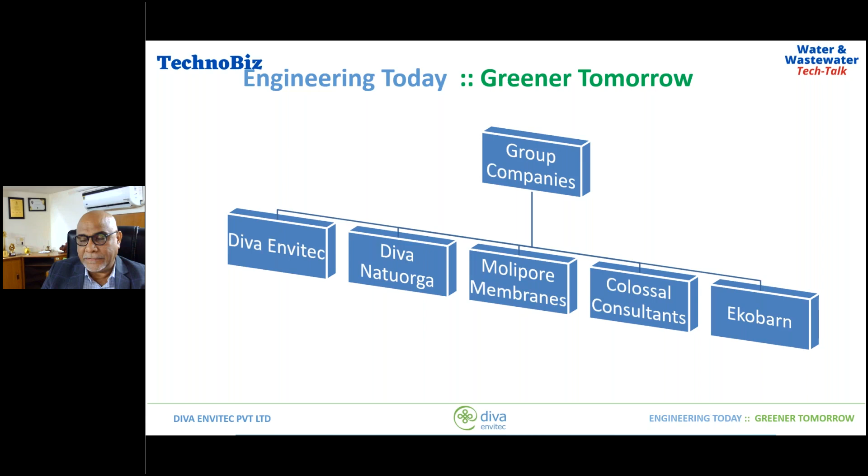I think of the four companies he mentioned, Colossal Consultants, I think he missed, which is a Dubai-based company. We have that mainly for analytical testing for the refining and oil industry.

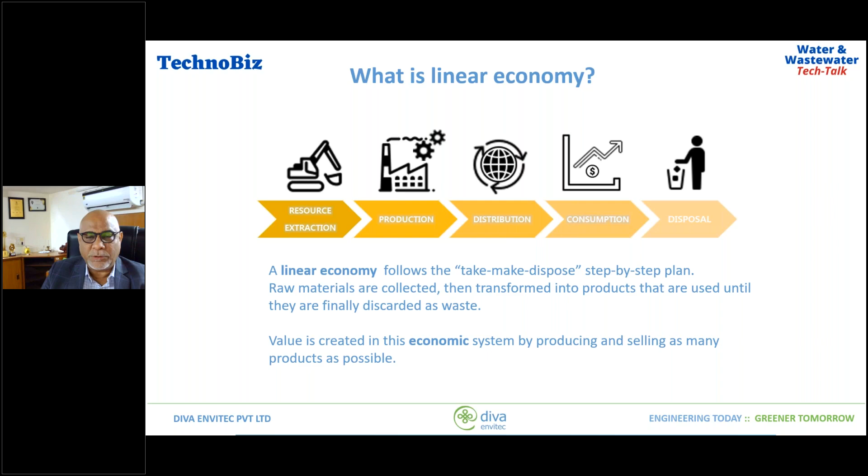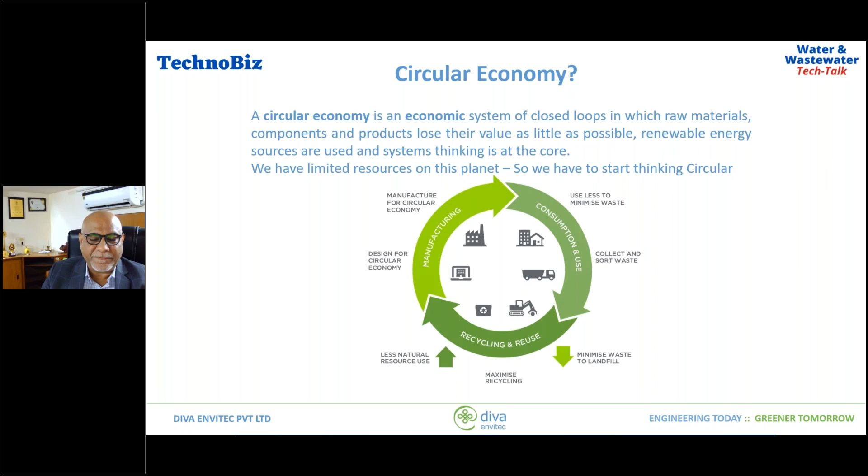As a company, we are totally focused on sustainability, and slowly we are taking most of the companies, training them to think on a circular economy rather than thinking linear. The world has been thinking linear, and that is where we have landed today. The problem of the world is that we have not really thought of the cradle to grave concept and how to use the final product. That is what has been missing, and we are now trying to, with my lectures on sustainability, talk about process intensification with different companies. The journey started from 1995. We have come to 2021, where our focus is now concentrated on wastewater. But beyond that, we are also in hot gas filtration, catalyst filtration, and hot gas liquid sparging systems.

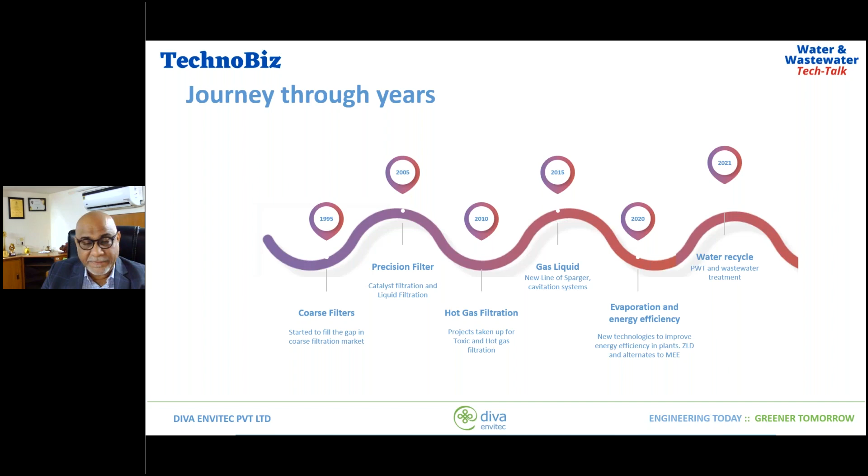So it's a very wide range of products which we offer. And in 35 years in this business, we are capable of designing very critical systems.

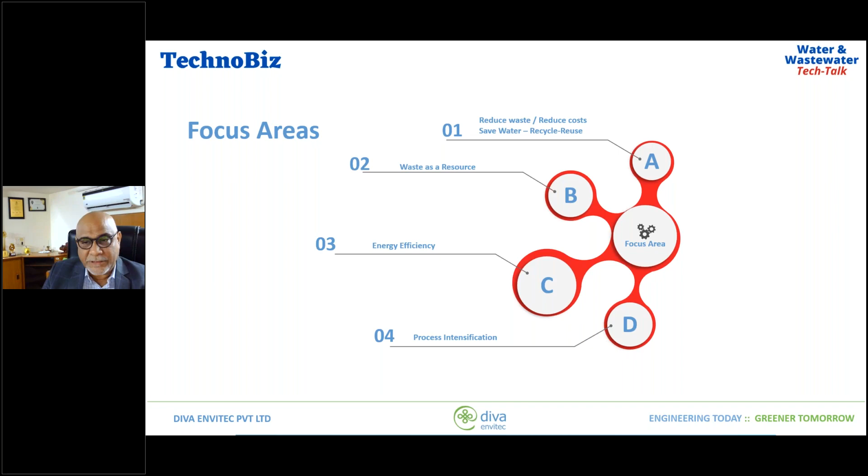Our focus areas, if you can see from this chart, this illustration, we are basically focusing on reducing waste, reducing costs, saving water, recycle, reuse. These are the buzzwords which will lead us to sustainable living down the line. Sustainable manufacturing has to focus on these areas, starting from energy efficiency to process intensification. So the five verticals we work in are filtration and separation, reaction engineering, thermal operation, mass transfer operation, and wastewater treatment.

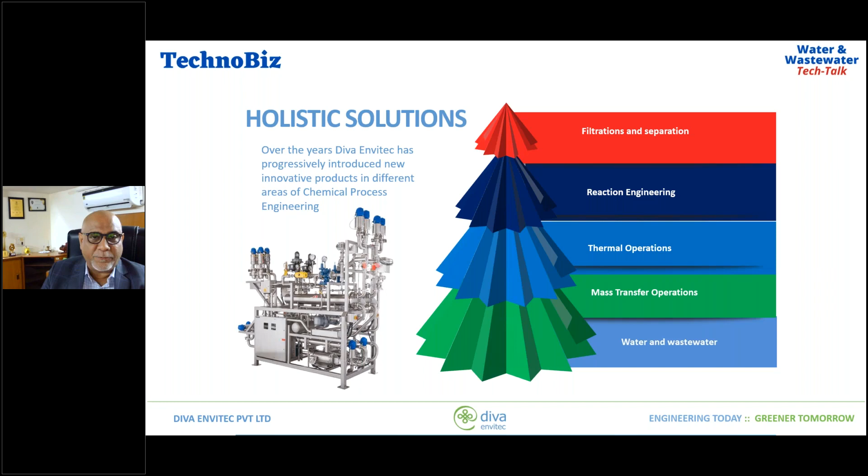Some critical products which we have developed over the years, these are our own products, which are DISORB, which we will be discussing in detail today. Then we have the ProMem, which is the membrane-based systems, PHTOX, spent caustic treatment for refinery, oil and gas sector, Supercav aeration systems, Molipore membrane, Rusonics for using cavitation as a process, and Contufilt for the filtration and catalyst.

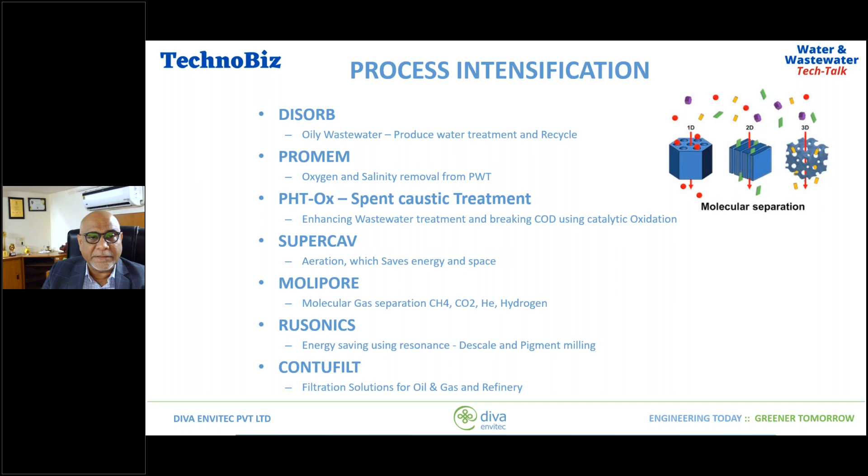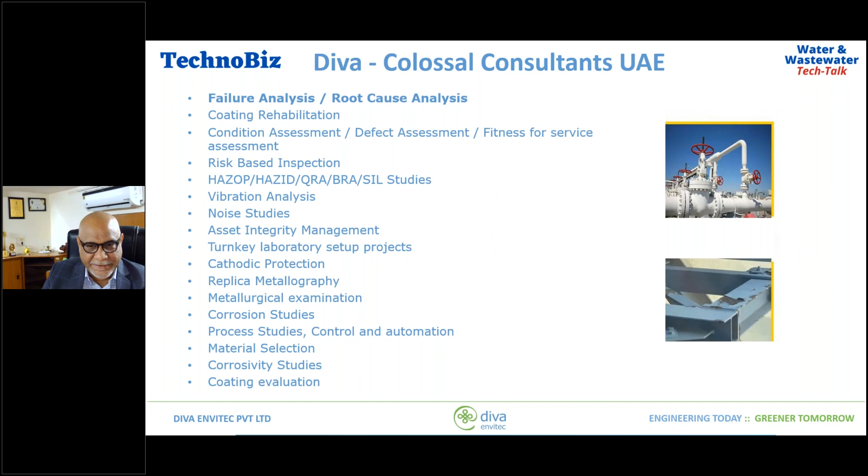So without spending much more time, let me just delve straight into the topic while we are here. And we are going to be discussing the DISORB technology. It's the oil separation technology for oily wastewater treatment.

Now, you all must be aware of different types of wastewater treatment where oils are concerned. So you have the plate interceptors, then we have the DAF systems, then we have the nutshell filters, we have the skimmers. There are so many technologies available, and we also know the challenges which they come with. So we have understood, and we are trying to address these challenges using our DISORB.

So what is DISORB? DISORB is an innovative, revolutionary technology in the oil and gas sector. We don't use any coatings, no polymers are used to create DISORB particles. It is basically an inherently oleophilic material. So it is made by calcining, and then it is sized.

We are getting some advantages. We get very high recovery of oil and water for recycle and reuse. We get high removal of oil and TSS. Now, oil and TSS together can be a nightmare in the produced water or in a refinery, where the sludgy waters come. It carries a lot of total suspended solids. And when oil and suspended solids get together, you get very greasy, lumpy masses.

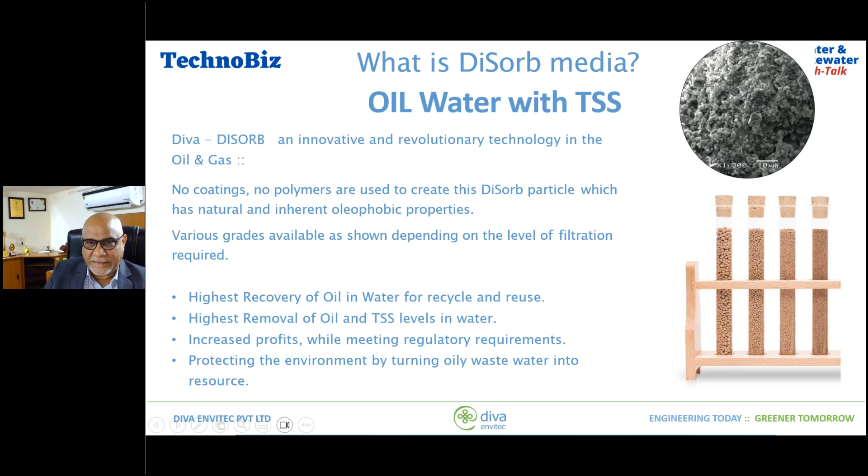Especially in the produced water plant, I don't know how many are from the produced water sector right now. The nutshell filters down the line, they get very badly choked, and sometimes you have to open and use crowbars to remove the media out. So we will be talking about the various advantages our media gives compared to the typical nutshell filter and the other technologies which are preceding a nutshell filter.

So it's a disruptive technology. It efficiently recovers water. It's oleophobic, as well as certain layers are hydrophilic in nature. So it has got anti-clumping coalescence, and it also controls hygroscopicity. So you can imagine we are trying to bring in so many characteristics in the media, and it comes with its inherent advantages.

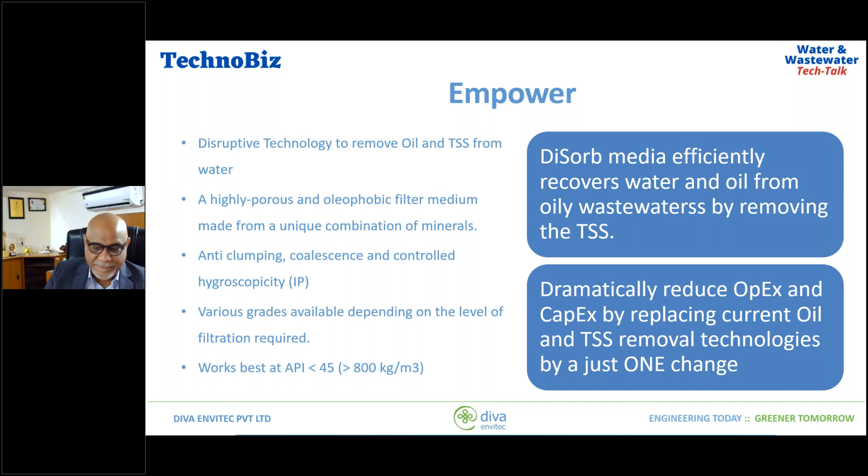It can be used in various parts of the oil industry. We have upstream water filtration. You have the frac water, which carries oil with it. You have the produced water, downstream waters. You have the slop oil waters, then processed water tailing ponds in refineries, then midstream oil transportation and storage, tank cleaning, oil recycling, and then soil remediation and oil removal.

Now, I'm sure some of these applications you will be able to resonate with if you belong to that industry. But having said that, I would say that this particular product which we have made also has immense applications in other industries. For example, the metal industry, where you have cutting oil, and on the rolling mills you have these oils and particles of metals and sludgy mass coming. It works beautifully over there.

In edible oil factories, where wash waters come to the effluent treatment, you all know that oil coming to the effluent treatment can cause havoc to the biology of the system. So whenever you have a biological treatment plant in any factory, you have to take care that the oil does not enter there. And the conventional methods which we are presently using, like dissolved air flotation or dissolved gas flotation or induced gas flotation, or API separators or corrugated plate interceptors, so many, there can be challenges in managing them, and those challenges can actually have certain surges of oil entering into the biological plants, which create a lot of problems.

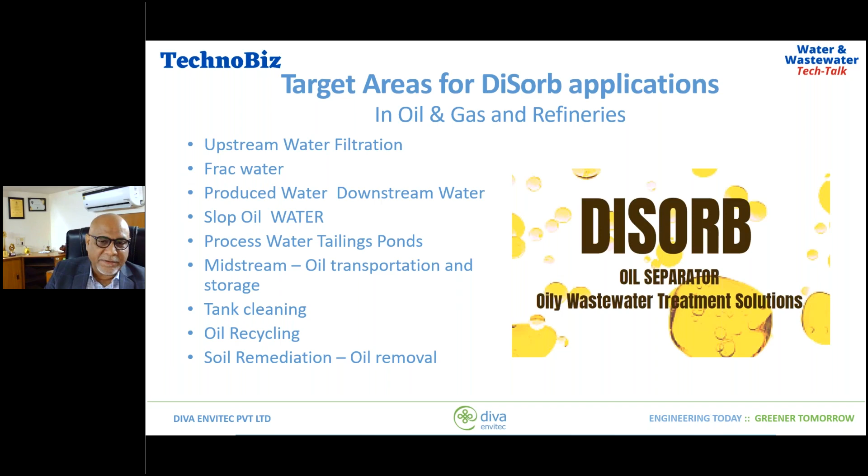We all know the principles behind coalescence. You have a particle, or rather a droplet, which goes at a particular velocity, and when it impinges against a fiber or a surface, in case of a plate interceptor, it's a plate it impinges on. In coalescers, it impinges on fibers, and in our media, it impinges on the media. But the principle of coalescence remains the same.

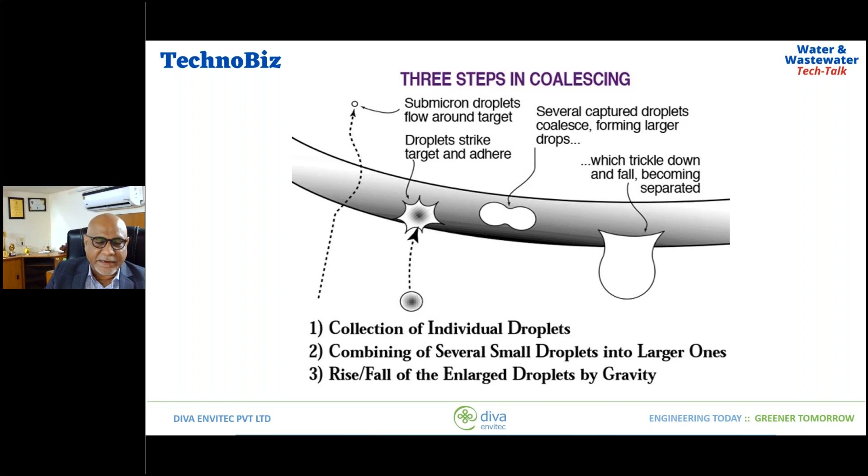So you have the submicron flows around the target, the droplet strikes and loses its velocity. Several captured droplets coalesce, forming a larger one, and then they trickle down and fall. So this is the principle behind coalescence.

If you look at the chart, you can use different technologies to treat different types of oils in water, or emulsions, colloidal emulsions, and that depends on the size of the droplet you are intercepting. So once you're getting to less than 1 micron droplets, the microfibers, hydrophobic fine fibers and membranes come into picture. Then you have ultrafiltration, where there are much larger particles or droplets to be removed. Ultrafiltration does a wonderful job.

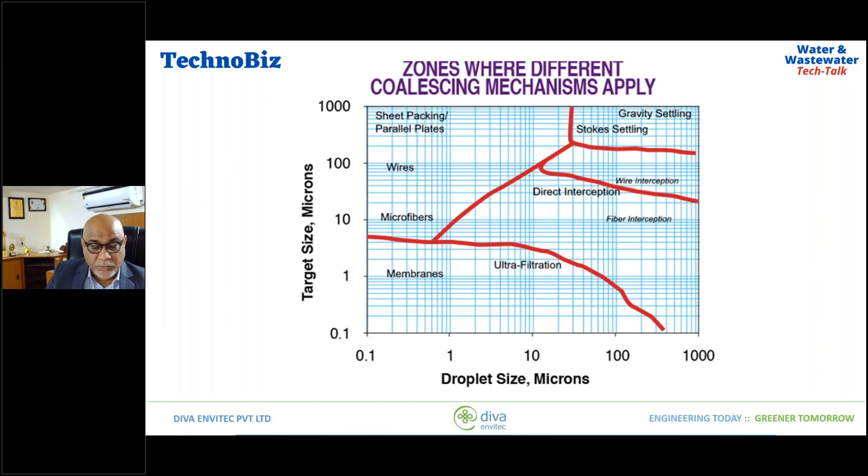Now we have introduced the complete ceramic range of oil removal systems. So based on the application, we decide whether we want to use a membrane, an ultrafiltration, or we are going to use the DISORB media. But for produced water, predominantly it is going to be DISORB, because of various reasons which we will discuss today.

So the same droplet coming, losing its velocity, it goes onto the filament or the particle where it hits.

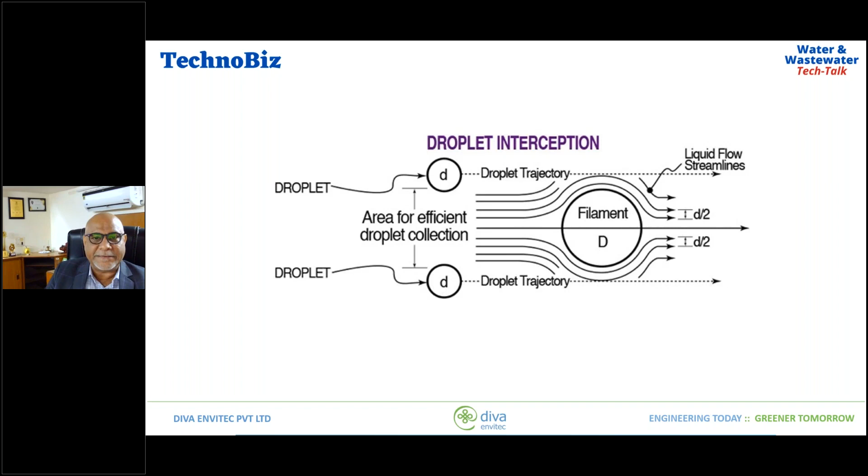It's a quick test to see how the emulsions are. If you take a water sample and keep it aside, and if the settling takes place in less than a minute, meaning the droplet sizes are settling or the flotation of the oil takes place in less than 1 minute with separation into 2 layers formed, then it is an oil droplet of more than 500 microns.

If it is taking about 10 or less than 10 minutes, it is between 100 and 500 microns. So it's a weak emulsion.

If it is taking hours, then it is a moderate emulsion, and normally the particle sizes are in the 40 to 100 micron range.

And if it's taking days, it is a strong, very stable emulsion, and droplet sizes can be 1 to 40 microns.

And if it is a very strong one, it never separates out, so it's blended with each other, made for each other, loving each other forever - that kind of bond they form. These are called colloidal suspensions, where the particles or droplets are less than a micron or sub-micron. And these are very tough to handle.

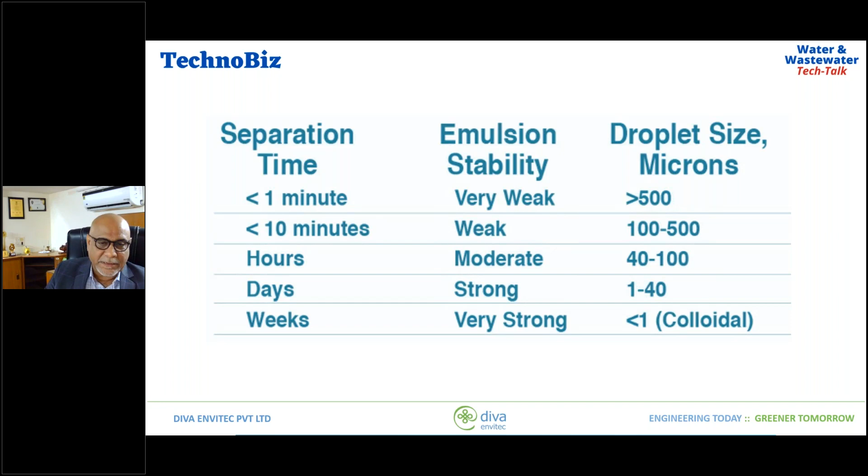So there are different types of technologies in the industry which are used. I'm just giving a brief overview so you can understand. I'm sure people must be using some of these technologies, and you'll be able to relate to what we are offering.

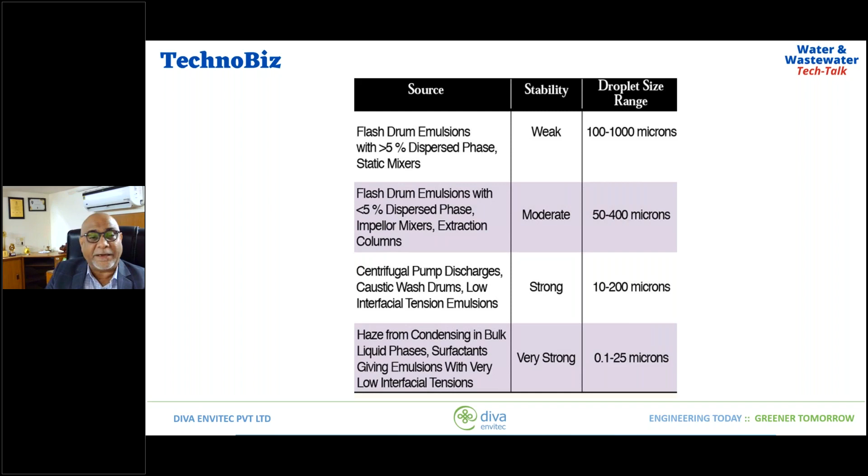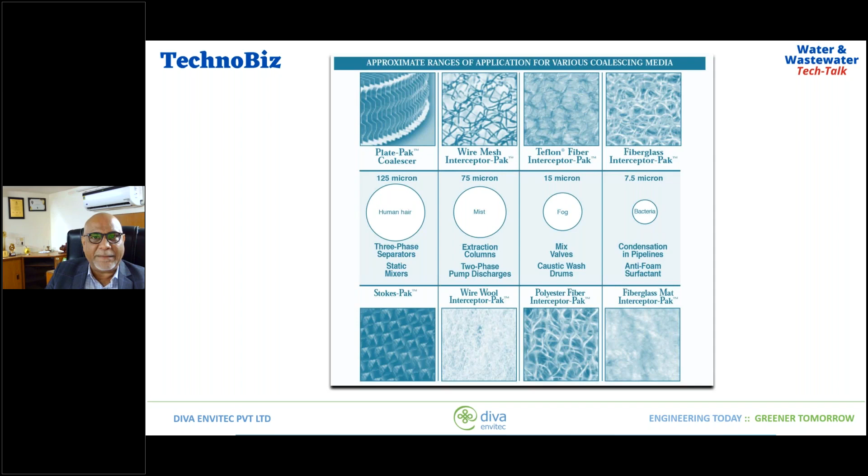So I will move forward. There's a lot on coalescence and different types of mediums, different types of coalescing media available in the market. So how does DISORB work?

Second, if you look at, we put in about 300 to 700 ppm oil and TSS, and we get almost 99% removal.

So far you see 1 to 300 also we got 99, 300 to 700 also 99. You will see in produced water plants or even in refineries, sometimes the loadings can go very high. Suddenly a shock of 3000 ppm comes. This intermittent load is handled by this media, and the outlet does not change.

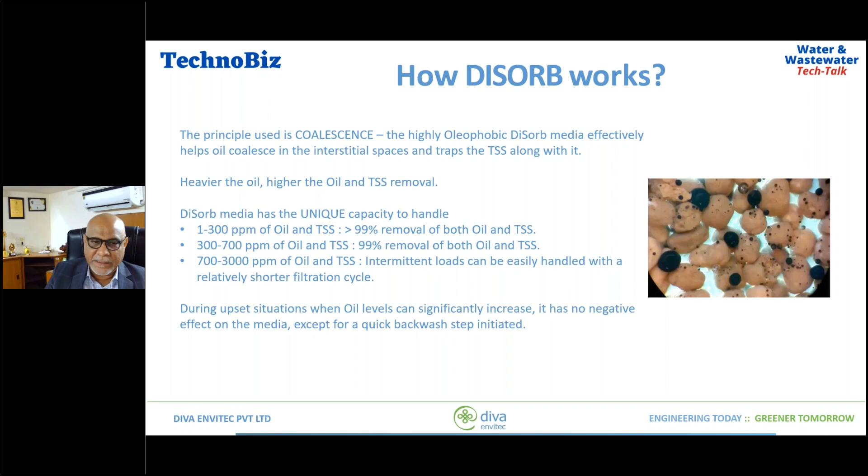So this is a graphic showing the magnification of the media. You see the structure at 19 kx, the 5 micron range, you can see how it looks. And this is 500 micron, you can see the second one.

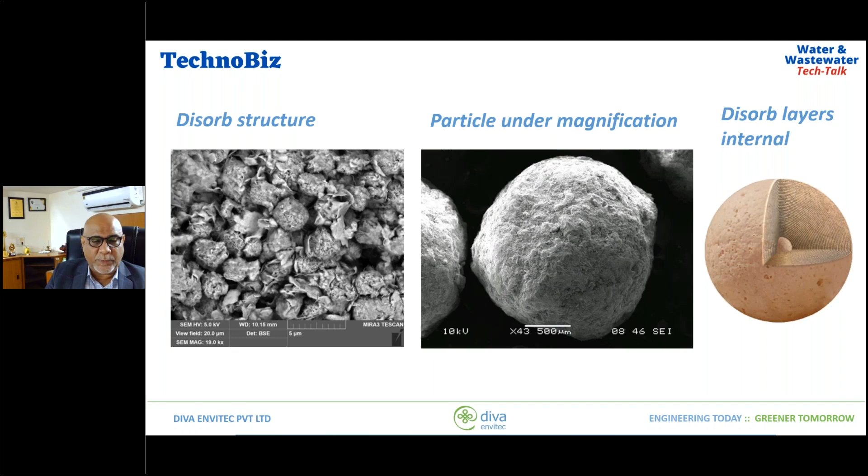And third one, you see the structure is layered and very porous. The oleophobicity comes from its natural clay-like material, which is calcined at 1200 degrees centigrade and then granulated. DISORB granule media are made of opal cristobalite rock with high porosity and oleophobic property. These properties create a water shield that prevents fouling or adhesion of oils or pollutants, and broken particles retain performance characteristics.

So it does not matter if it chips or breaks, the fresh surface which comes out has the same property. It's not that we have surface coated it - it is inherently the whole media itself having the same property. By abrasion, if the particles break somehow, although the breakage is very, very low - I'll show you in one of the slides compared to a nutshell how much is the breakage in this. DISORB media is a proprietary pelletizing biogenic sedimentary algae with the highest hygroscopicity for pollutant entrapment.

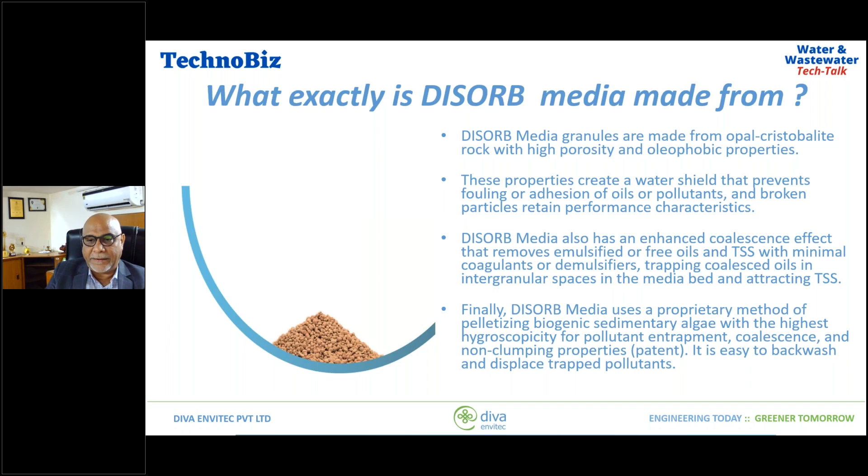So here is a comparison between a nutshell media and a DISORB media. What is a nutshell media doing? You have nutshells - you know what a nutshell media is, but let me tell you. This is basically the walnut, the shell of that has certain properties. So some companies in the past have broken it, sized it. You get different types of sizes, and they fill it up in a bed like a sand filter or a mixed bed media filter. They put nutshells into it, and the nutshell media's working principle is adsorption.

Whereas our DISORB media has a principle of coalescence. We discussed coalescence in a few slides before. So you can see in adsorption what happens is the oil goes and spreads all over the media. Whereas in coalescence, it does not even stick to the surface of the media, but because of losing its velocity while it's traveling, the coalescing effect starts.

Lower retention of oil and TSS in natural media, whereas in our DISORB media, we have 10 times higher retention in oil. So you can imagine the magnitude of difference - we are talking about a 10x difference.

Natural media needs very vigorous agitation scrubbing with backwash. Like I told you in the beginning, the principle is adsorption, that means oil gets stuck on the surface. So to remove it, you actually need to scrub it like a brush. But since you can't do brush, what we do is we put air, we put backwash at a high velocity, and we create agitation in the whole bed so that we can clean up the whole media.

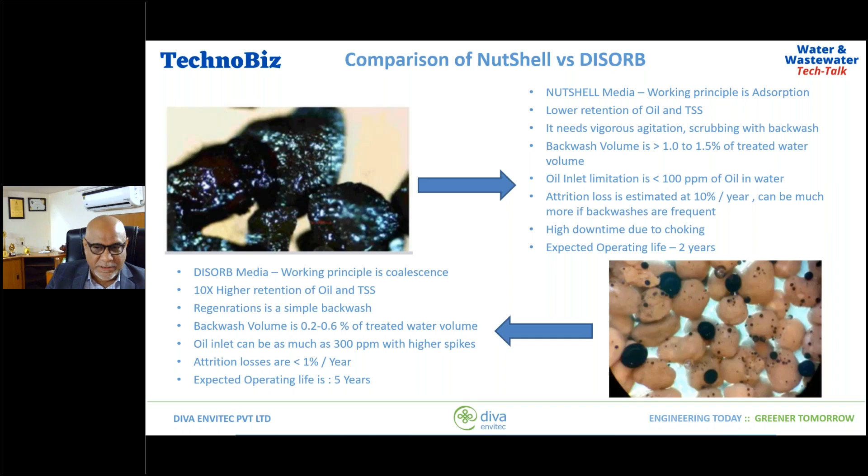Because of that, you can see the life of the bed is extended - 2 years versus 5 years expected operating life. So that is the standing out advantage which nutshell and DISORB have against each other. DISORB stands out like a brilliant chap now.

Now coming to a typical produced water treatment scheme, we have a skim tank normally, typically - I'm not saying that is everywhere. It could be a skim tank. There could be an intermediate stage before the IGF, which is the induced gas flotation. Before that, there could be a CPI or TPI, whatever you call it, plate separators. Then we could go to an IGF, where oil could come down to 30 to 40 ppm.

Then it is taken to a nutshell filter, where it comes down to less than 5 ppm. So you see, nutshell can barely take loads more than 40, 50 ppm on a continuous basis. So we can actually come in, replace the complete IGF and NSF from the plant. It can be thrown out, and we can use the vessels of the NSF, remove the media, and fill it up with the DISORB media, and straight from the skim tank, you go to less than 3 ppm in one shot. So you can see the number of operations which are stopping now, the way the system is going to work, the ease of operation.

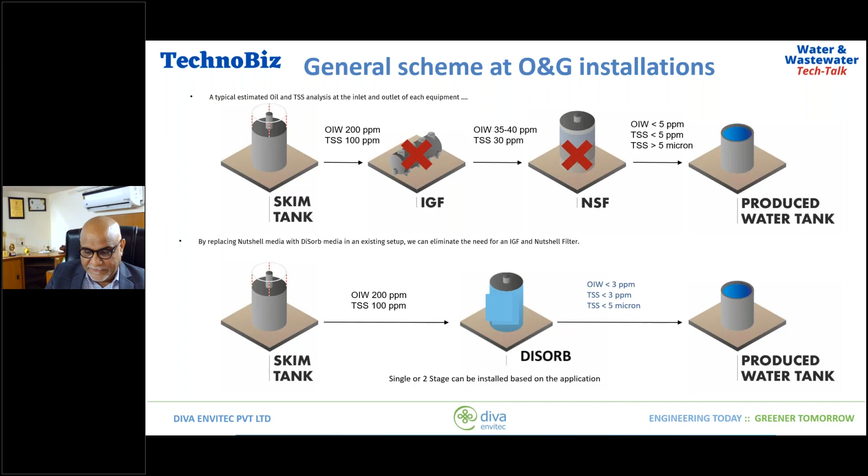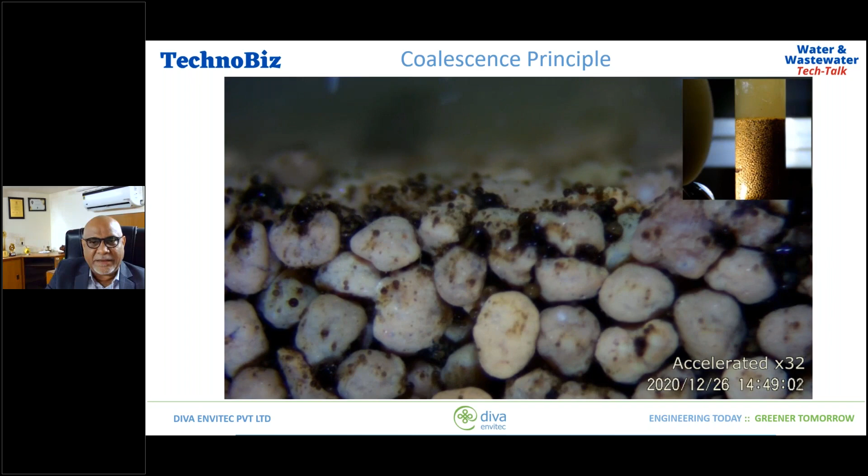Now I will be showing you how the coalescence takes place. It's a very small video which will show you how the coalescence takes place. This was taken in 2020. The speed of this video is 32x, so it's a much accelerated video. You can see water coming in with some ppm of oil and how it impinges on the media. Slowly the small droplets get together and they start building.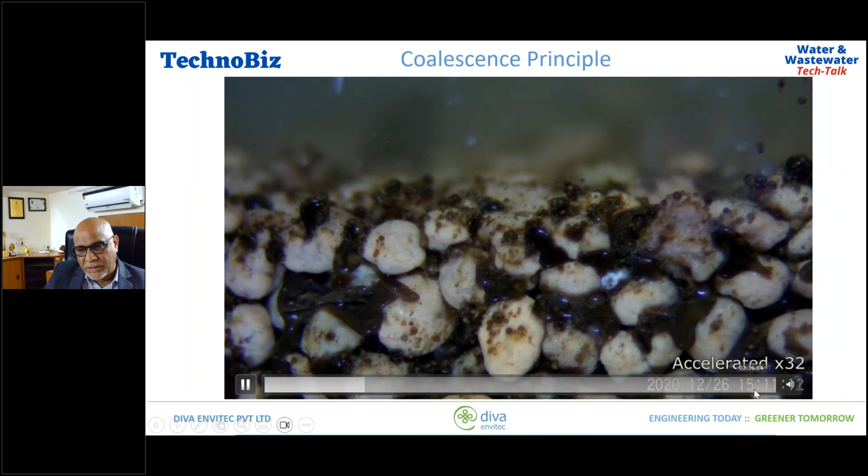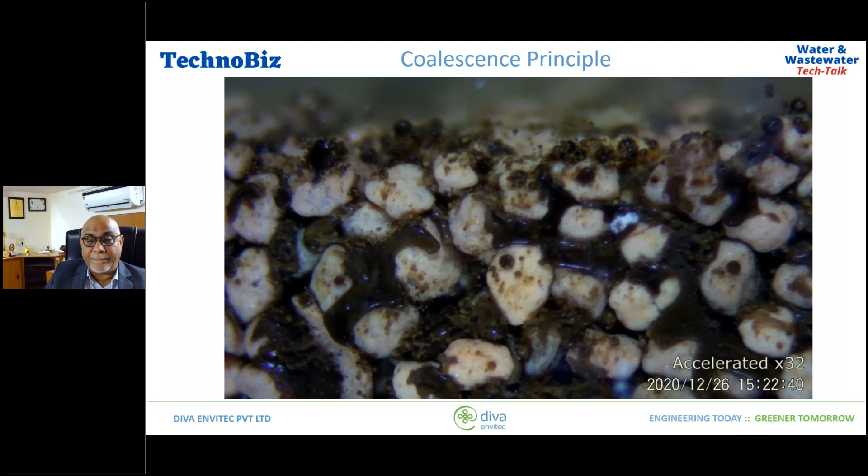This time was 14:55. Now this is about 15 minutes later. You see the oil has now coalesced into lumps. They are becoming bigger and bigger. The time lapse will go further and you will see how the bed will start filling up with oil. That video will be the next one which I'll show you, where you will see how the bed starts filling up from a very nice golden brown color. The whole bed becomes dark because of the oil it is capturing over a period of time.

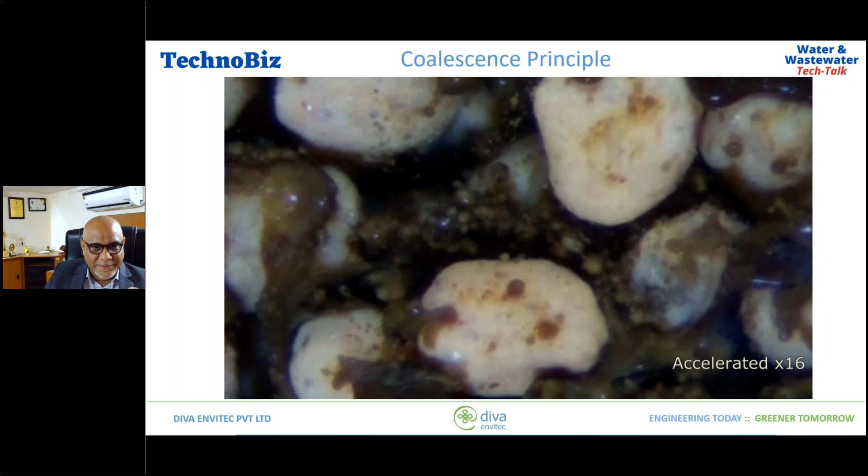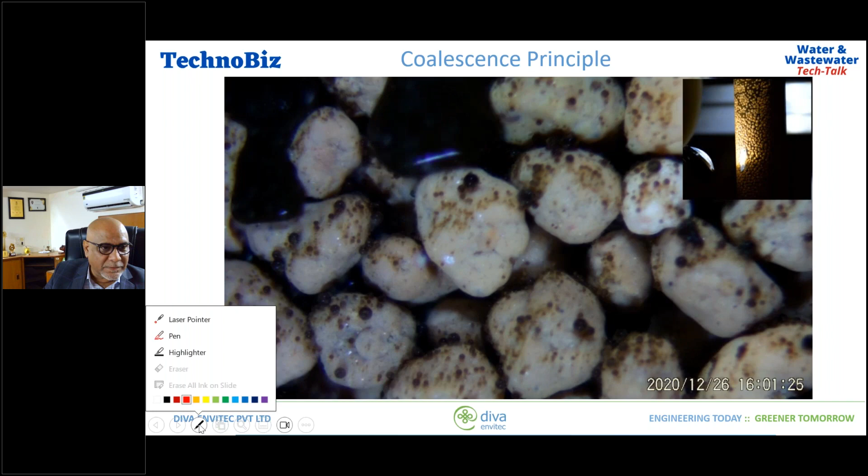What you should really notice here is that the hydrophobicity of the media is so beautifully represented in this video. Now you see this - let me take a laser out. Yeah, so this you see is the bed. It's a lab bed, and you see the oil is percolating down slowly. What you see on a big screen here, the whole oil will fill up the bed, and the moment you see the passage coming, that is the time to backwash the bed.

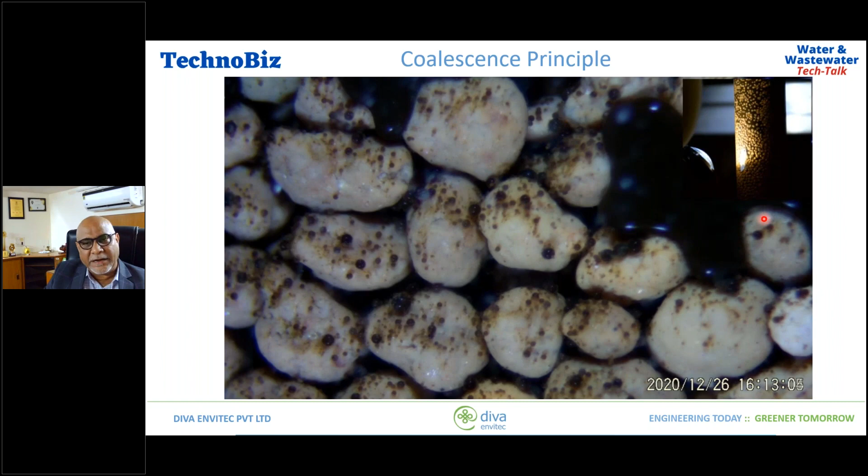It creates voids so that water can continue to pass, but at the same time the oil starts filling up the bed. You see the oil trickling down here. It is amazing how oil behaves with this media.

Okay, so let us move on to the next slide, next image.

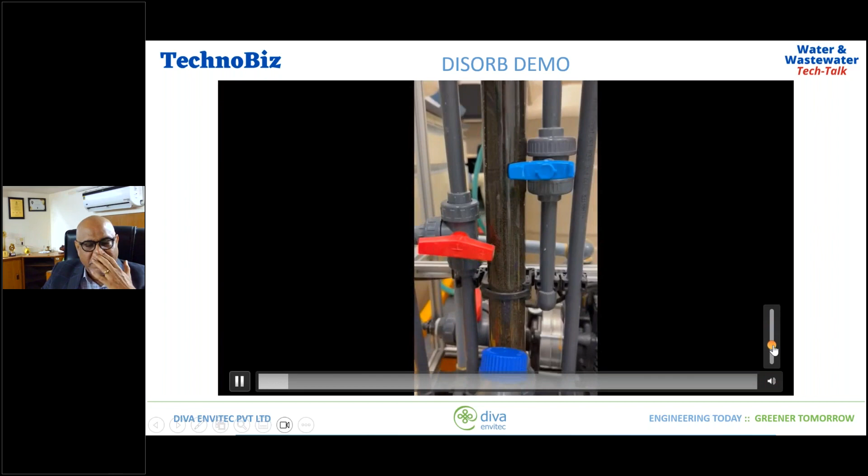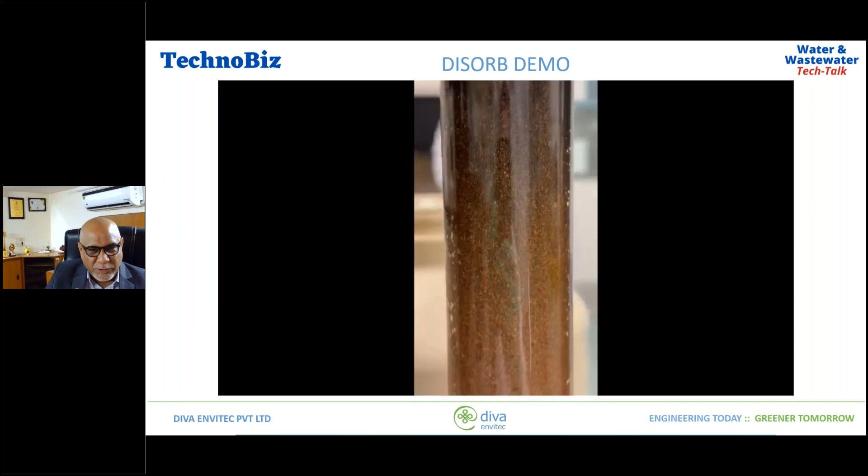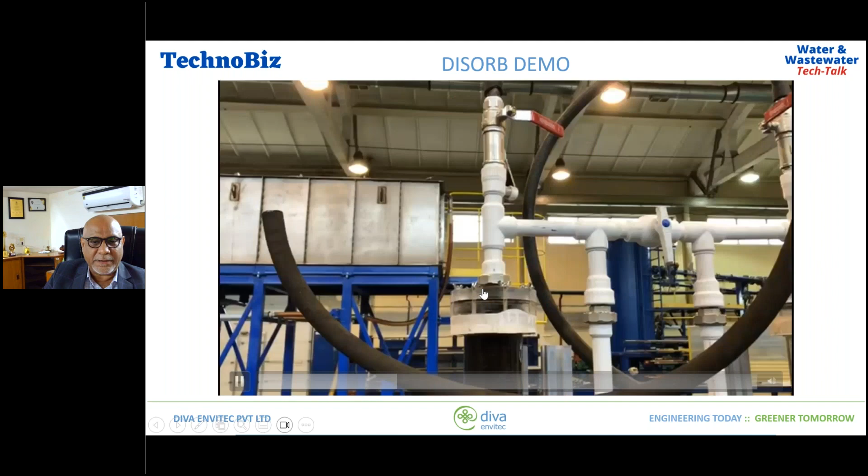A pilot demonstrates how the media is working, how the backwash is fed into a specific bed which gets created just to demonstrate how the media works. What will be coming out, the first thing will be from a dark, blackish colored heavily oily water, we are coming to slightly lighter oily water.

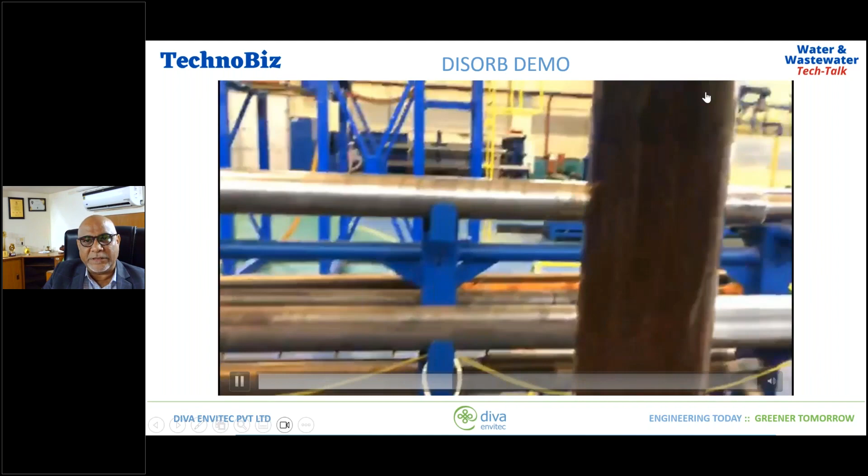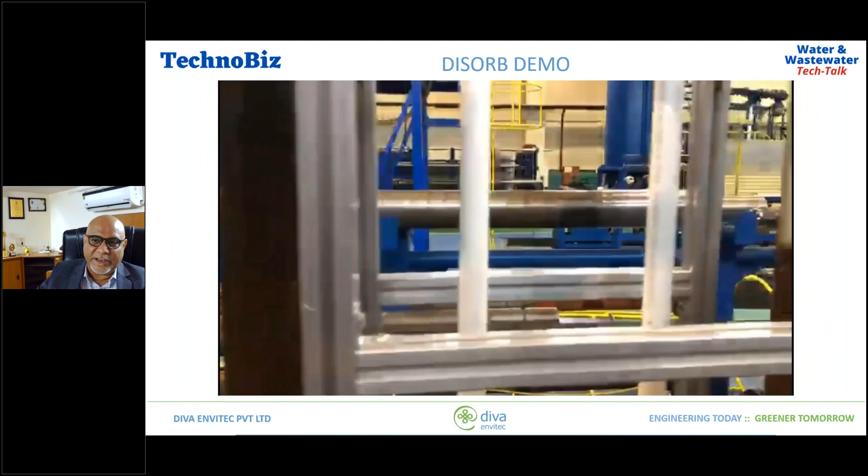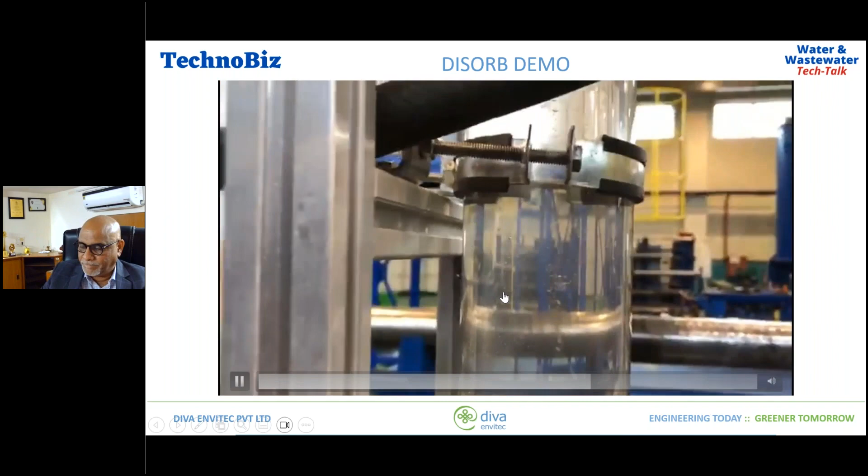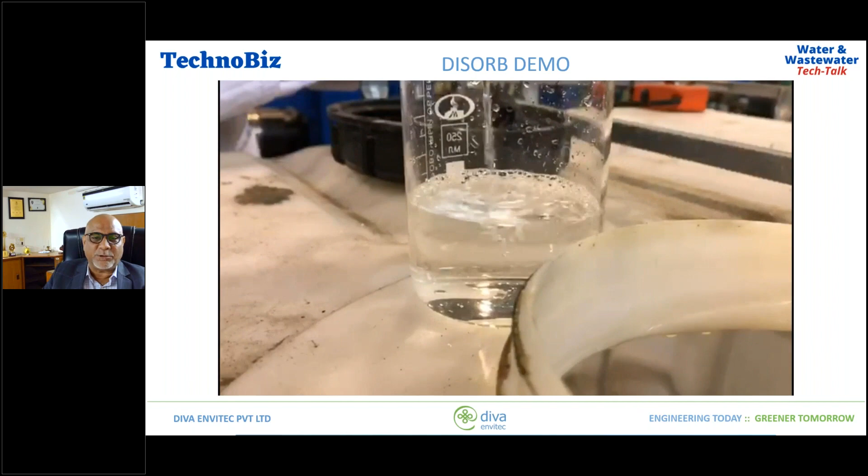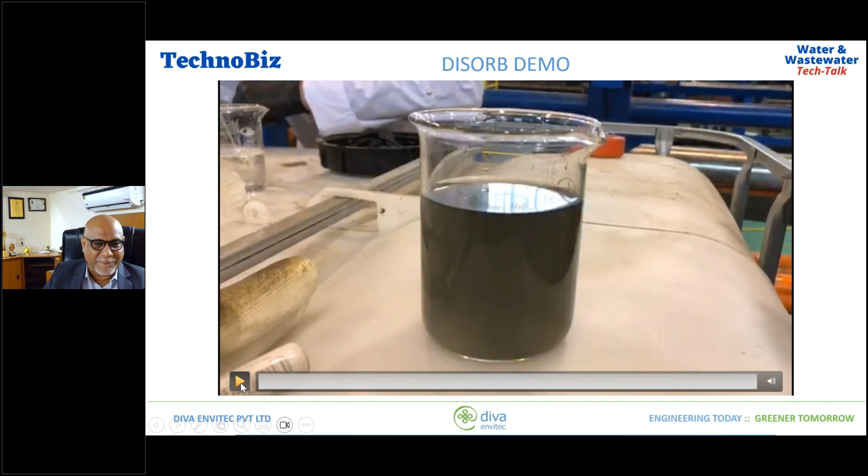That is how it passes, and what you get here is clean water coming out. No IGF, no CPI, nothing. Just by passing through this column, the water has become absolutely clean. It's not magic, it is true. I know some people will say it is too good to be true, but yes, it does happen like that.

This is the application where we are talking of a very small pilot again, 15 meter cube per hour. The service flux rate in meters per hour is 18 to 21. When I talk about service flux rate, that is basically the velocity you will use, and that is dependent on quite a few factors: the API, the oil viscosity, what kind of oil it is, how much is the loading of solids, what is the total load, and the drop size of the oil. So the velocities have to be varied based on the application.

This is the backwash. I can hear a voice, baby talking.

Anyway, so we have an inlet ranging from 4 to 906, and outlet of the oil at the bottom you see is in the range of 0.1 to 5 ppm.

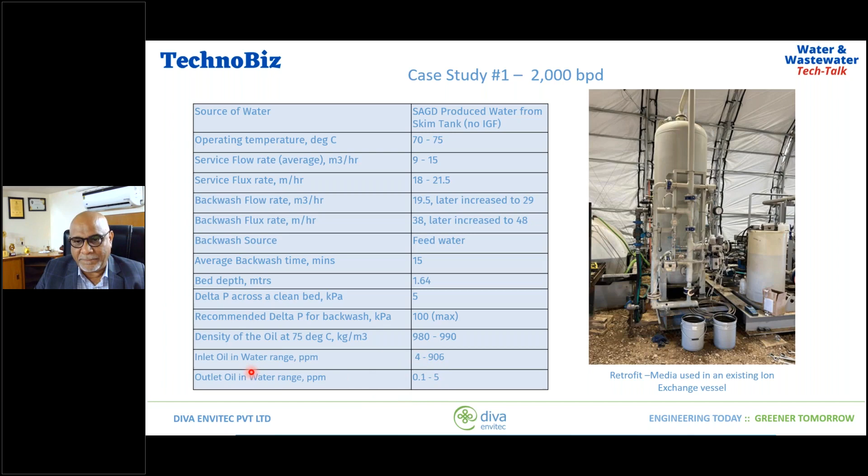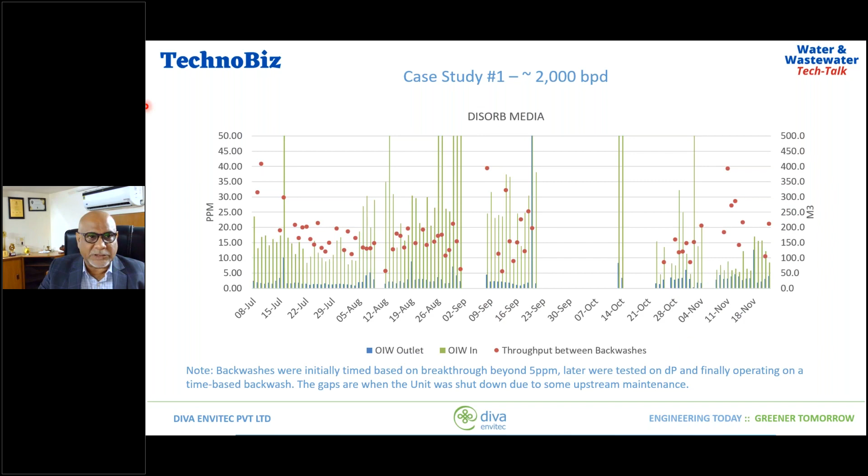So you go to a site and see the loads. Statistically, you come to a conclusion that maybe after 24 hours, you have to do one backwash, depending on the oil loads etc. The red ones are the backwash cycle, and you see the amount of water which has passed through, with peak loads of 50 ppm.

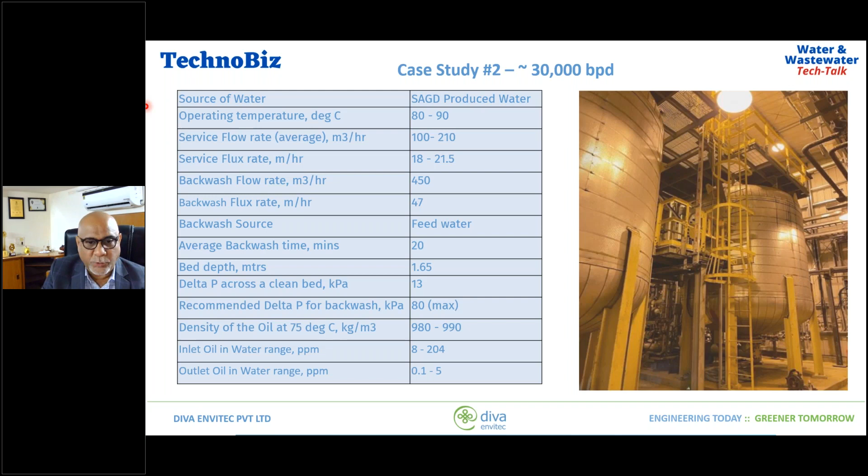The next one you see is about 100 to 200 meter cube per hour plant, which is again produced water. The backwash flow rate is 450, and the service flux rate was around 18 to 21.5. You had a peak load of oil in the inlet up to 200 sometimes, but normally it was 8 to 10, and outlet was always coming to 0.1 to 5 ppm.

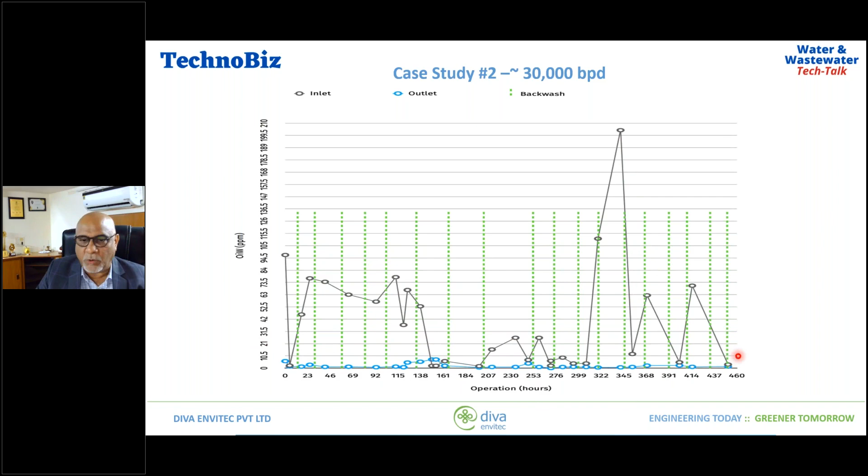Now you look at this graph here, you have the inlet parameters, and this peak you see, which is around 200 plus, that is the peak, and the outlet is the blue line at the bottom. You see that it is always less than 5 ppm. So it did not matter what the incoming load was, sometimes 75, sometimes very less, sometimes peaking at 200 - the outlet quality did not vary. That is the beauty of this system.

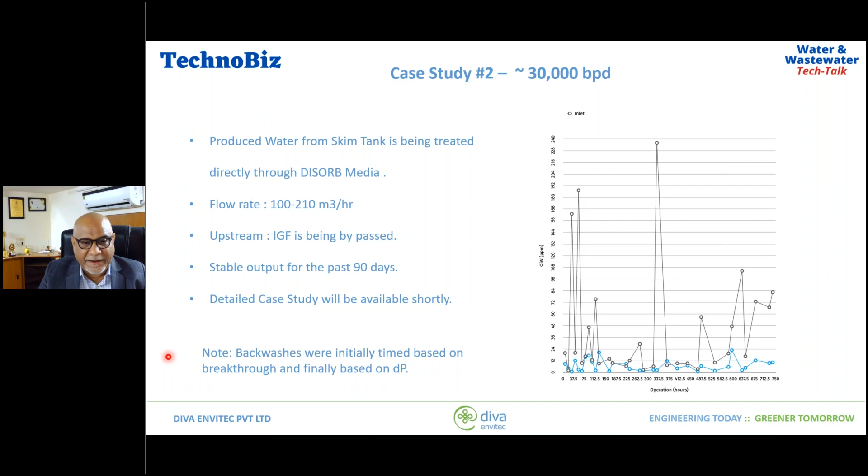So produced water from the skim tank is being treated directly through DISORB media. IGF is being bypassed now in this site. Stable output for the past 90 days. Backwashes were initially timed based on breakthrough, and finally it is based on DP. So this is the present status of the site.

Now this is another site with a bitumen production thermal plant. Here we have done 558 meter cube per hour. From DISORB it goes straight to a granulated activated carbon, then to an RO, then to an ion exchange, then to a boiler. So the water is becoming boiler feed water in this case. The DISORB was being used to protect the ultrafiltration membranes.

130 meter cube DISORB was used in 2 filters, and we used a filtration speed of 20. Inlet parameters were 40 to 60, and outlet was 0.1 to 2 milligrams per liter. It's been operating since February 2019. 3 identical projects were targeted for completion by 2022, but because of some delays, this has gone a bit further.

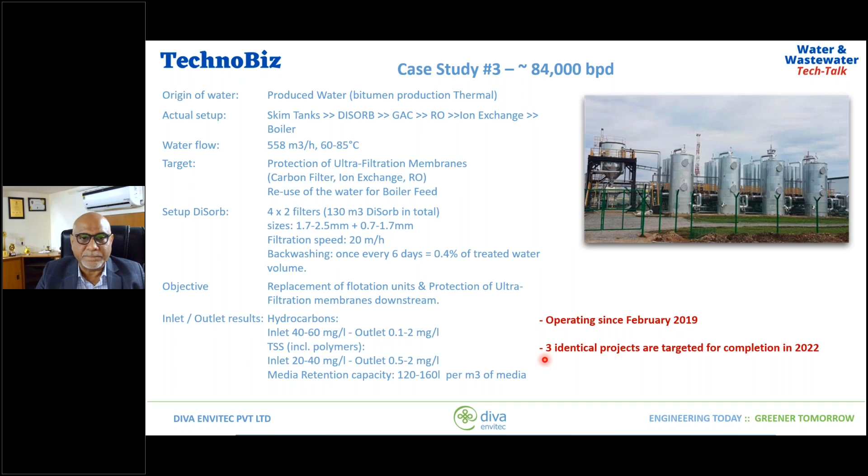Now, when I say ASP, that is surfactant and polymer based water. Anionic surfactants and polymers are used to maintain the viscosity of produced water in the oil well, and the oil and produced water comes along with these polymers. If that polymer goes into a nutshell, it can be a nightmare, and it is a nightmare - people don't know how to handle it because it forms foam. Whereas because of the hydrophobicity of DISORB, it does not give any problem, and we can maintain consistent results and flux.

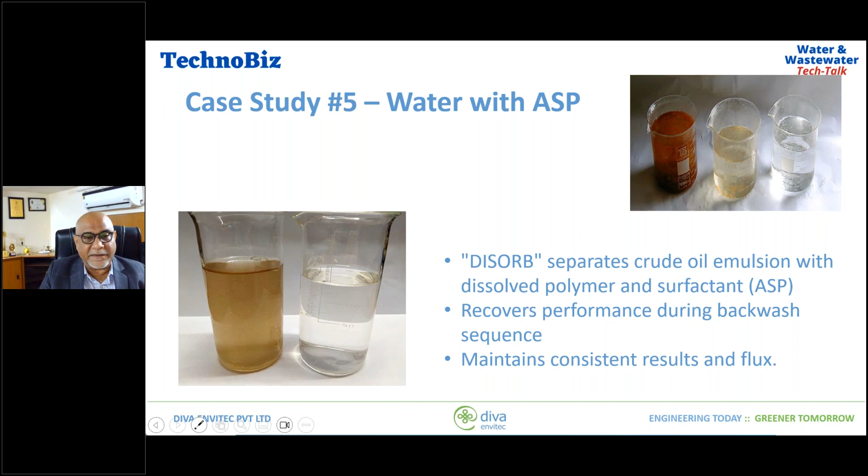This is a typical P&ID, which you all must be aware of - it's a sand filter P&ID, also a nutshell filter P&ID. There's nothing different, it just replaces the media with our DISORB media.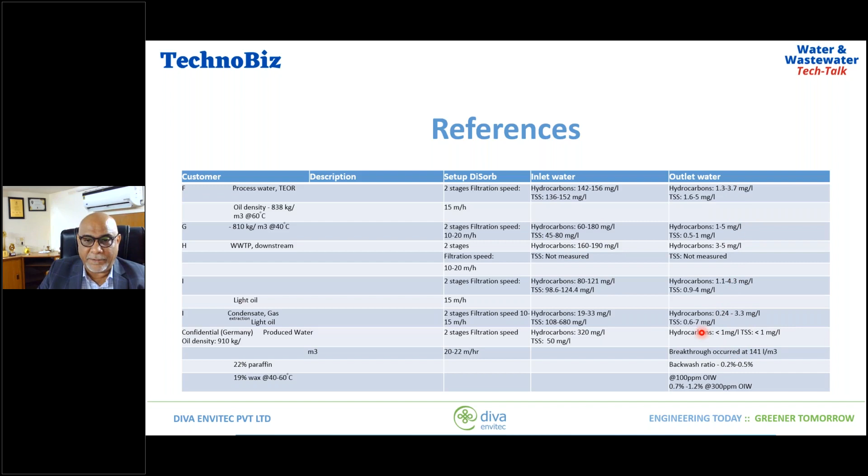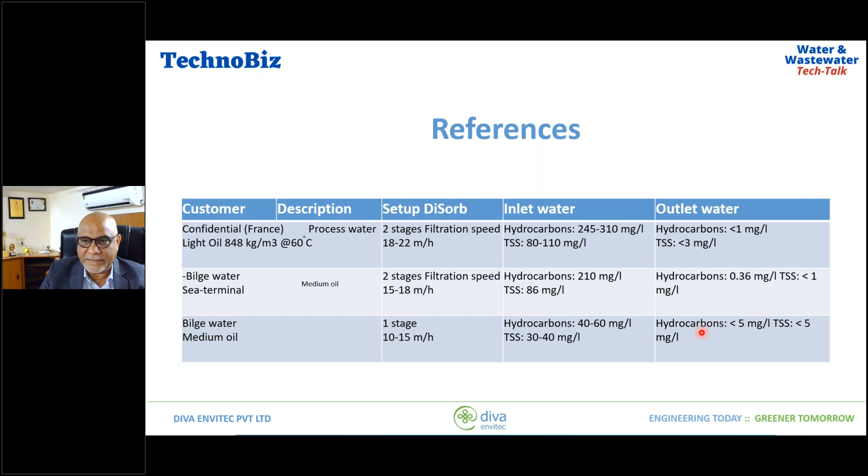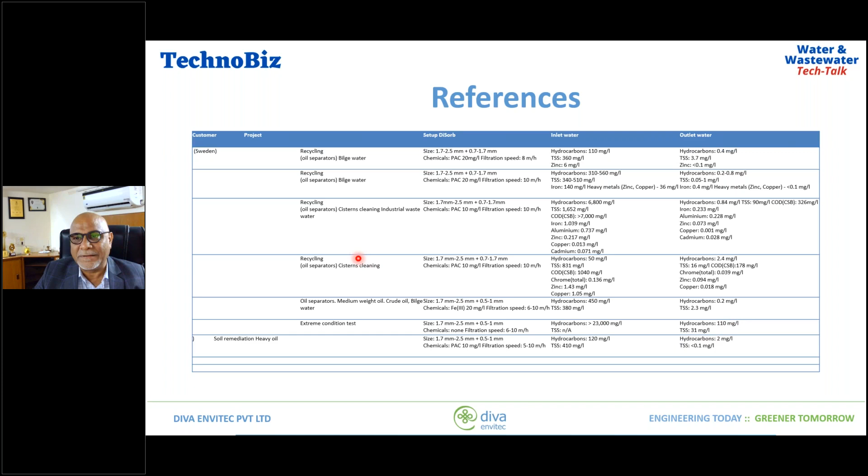250 comes down to less than 1. Here's the bilge water, which is 210, down to less than 0.36. Another bilge water with medium oil. Now here, in the second last column, there was an extreme condition - 23,000 was the shock, and what came out was 110 milligrams. Can you feed 23,000 to any filter and get 110 out? So you can see the range it can capture.

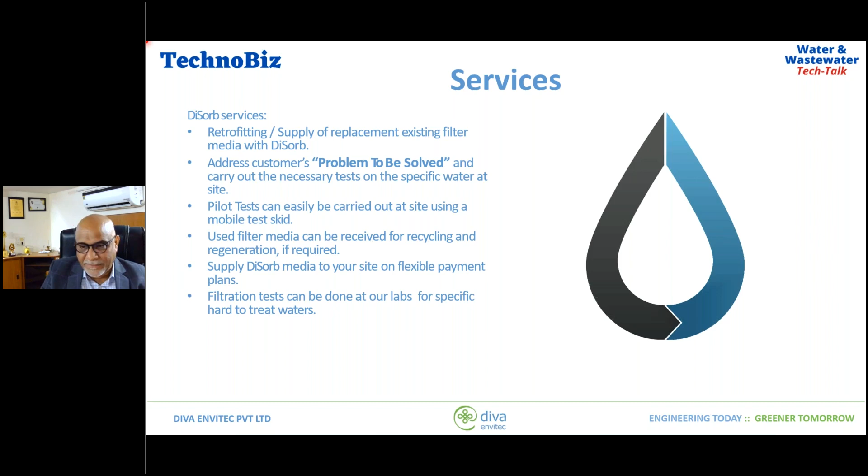So DISORB services include retrofitting and supply of replacement for existing filter media with DISORB. We address customer problems, carry out necessary tests required. Pilot is always available if you want - piloting can be done, or media can be sent.

What are the advantages? We'll run through them once again. We have high oil loading capacity, low backwash volumes, 25 to 30% bed expansion, exceptional performance - 300 ppm and 100 ppm TSS coming down to less than 3 ppm.

Backwashing is obviously very, very good. Attrition rate is less than 1% per year, and no media preparation is required before startup. DISORB media performs well in high H2S applications - when the sulfur loading is high, it really performs well. It's neutral to polymers, bitumen, asphaltene, paraffins, and bacteria, because these are all organics, and due to its hydrophobicity and oleophobicity, it repels all of these.

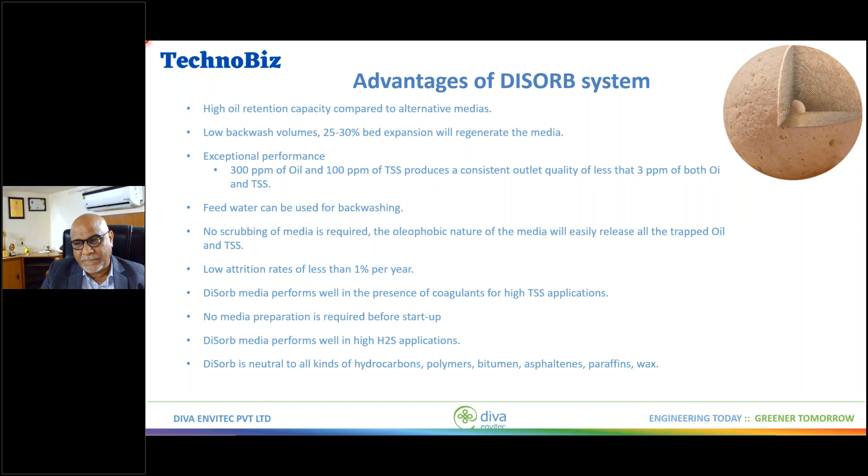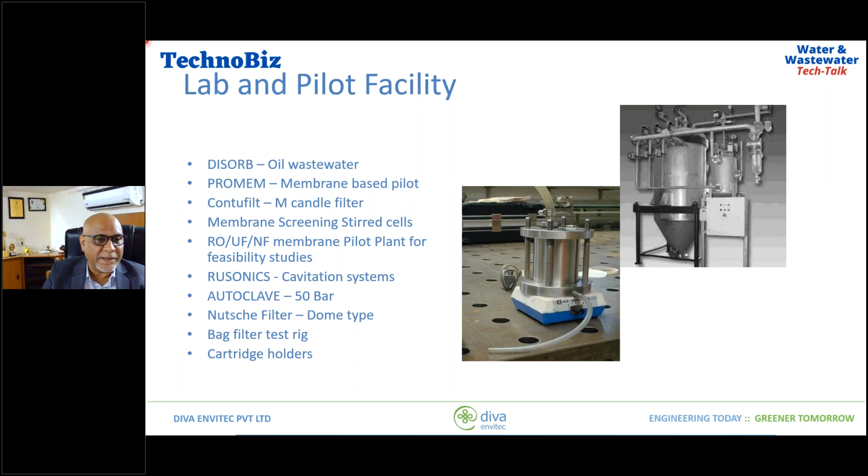So that was about DISORB and its advantages. I'll quickly cover other things we do - we have a lab with complete facility for carrying out DISORB oil water tests. We have a membrane-based complete range of membranes, from RO to nanofiltration, mainly for process applications. Wastewater is a key area, especially toxic refractories and CODs, which we concentrate on. We also have cavitation systems and a complete lab facility with different equipment, plus a quick list of clients. I think that's a quick roundup of what DISORB media is all about.

Now we can have a one-to-one chat or question and answer session if you have any.

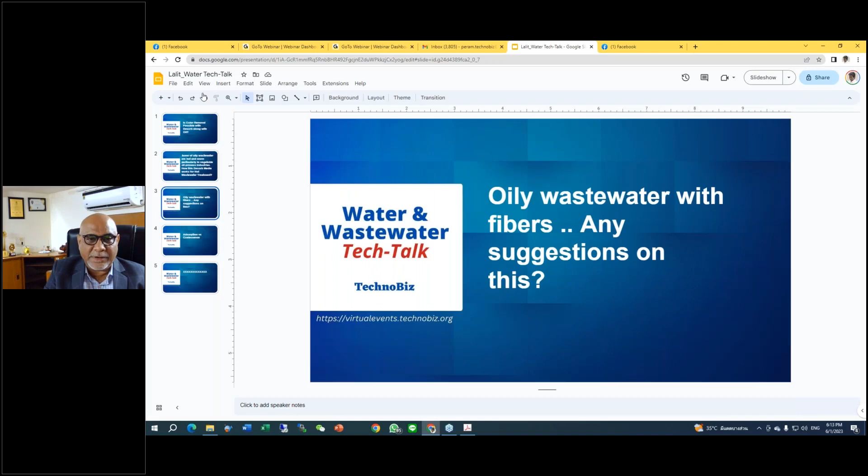Very good question. DISORB media is quite stable under hot conditions. Normally water would not go beyond 80 to 100 degrees centigrade max, so the media is very stable at those temperatures, and oil properties don't change, oleophobicity doesn't change, although it becomes less viscous at high temperatures. But it definitely does coalesce at that temperature also. So in the vegetable oil industry, yes, it can work very well even at high temperatures.

Coming to the next question, oily wastewater with fibers. Any suggestion on this? I don't know which industry you're talking about. If fibers are very small, tailings kind of fibers, they tend to pass through a DISORB media. But if these are long fibers, we'll always have problems because they entangle, make webs inside, and start making the media into lumps. They go around the media in clusters, and that could be a challenge. So fibers, I would say, are avoidable. Does that answer your question? I don't know, you can tell me which industry this question is coming from.

Adsorption versus coalescence principles, I think we discussed that in the few slides before. Absorption is when you have a porous media and the liquid absorbs into the media, meaning it is picked up and goes into the pores of the media, and that's called absorption. Very different from adsorption, but adsorption is a surface phenomenon. Because of the charges, it captures the oil.